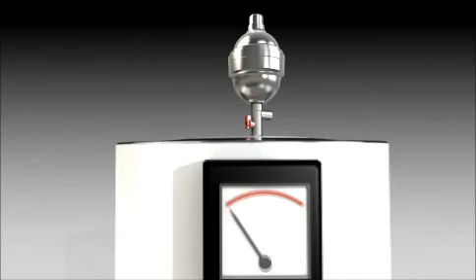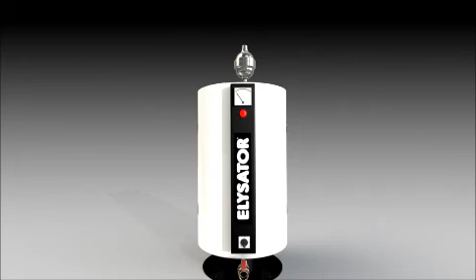What is an Elysator? The Elysator is a single tank that is fitted to the circulation or feed water system on heating and cooling systems where protection against corrosion and scale is required. The unit includes a pure magnesium anode, a cyclone filter and a galvanometer.

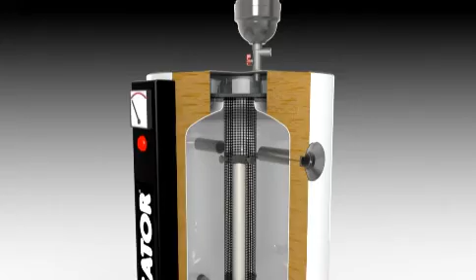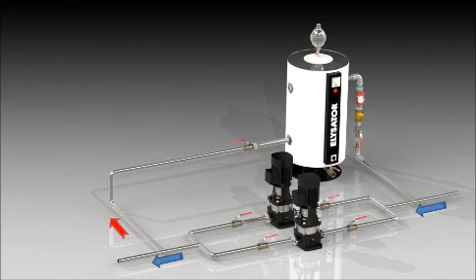The function of the Elysator is based on the anodic, cathodic principle, that is the allowance of a less noble metal, magnesium, to be sacrificed, corroded, instead of the system itself. During the corrosion process of the anodes, oxygen is consumed, creating H2O and magnesium hydroxide, therefore providing clean alkaline water that prevents corrosion and scale in the system.

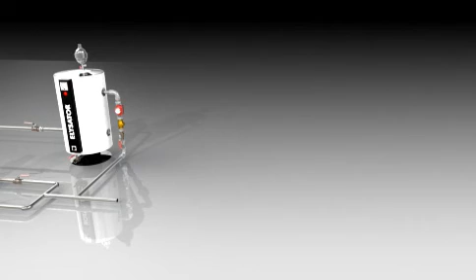Installation of Elysator. The Elysator should be installed in a bypass, so that a small volume of the total water volume will flow through. The Elysator does not have any electrical connection and does not use electricity. For some installations, like boilers, a small circulating pump is necessary.

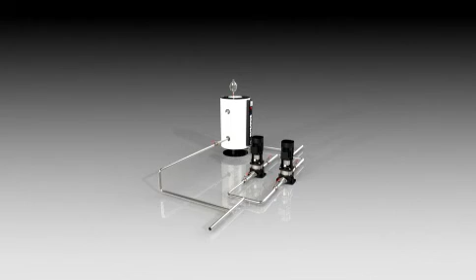The Elysator should be installed as close to the pump as possible, and at or below the lowest point in the system. The reason for this is that you want to collect as many particles as possible and to remove them from the system by the daily or weekly 10 to 30 second draining of the tank. Draining is to be done with full flow through the tank.

Always check that there is enough free height above the tank to pull the anodes for cleaning, types 15 to 260, and easy access to the drain valve. Elysator corrosion protection.

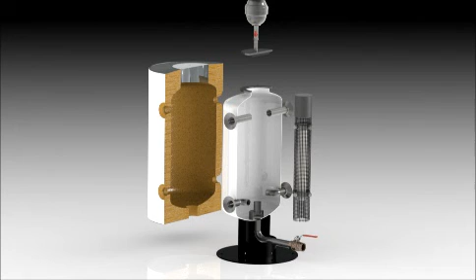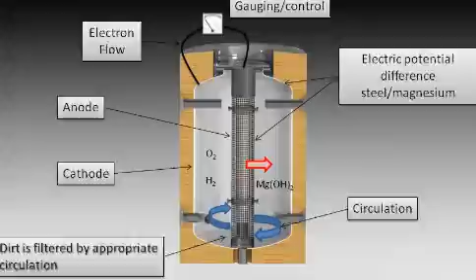Elysator is a circulation tank fitted with completely pure magnesium anodes. It is fitted into the water flow of the heating system by means of a bypass. Through a cathodic, anodic reaction with a sacrificial metal, magnesium, oxygen which is dissolved in the water is decreased to a safe level. Through this procedure magnesium hydroxide is formed, which leads to the pH value of the water increasing to an optimum level.

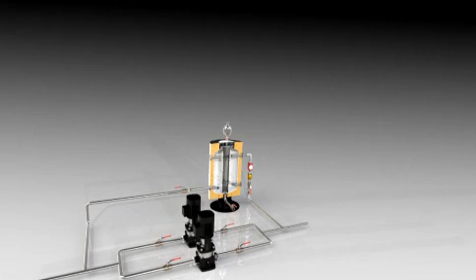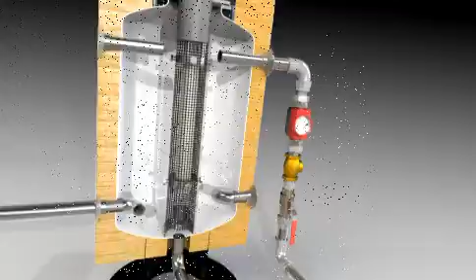Dependent on the system's water composition, the electrical conductivity then drops because the hardness of the water partially disappears. Therefore alkaline water with little salt content and with minimal oxygen concentration is produced. In systems where the water is changed by this procedure, no corrosion damage will occur.

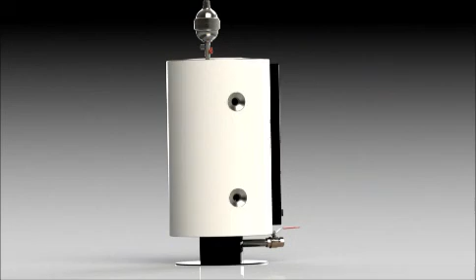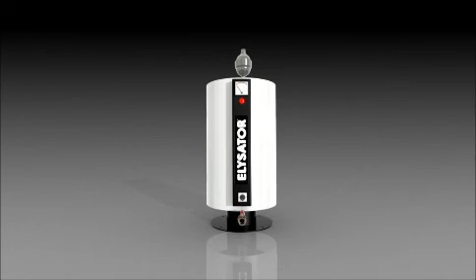By means of a built-in cyclone filter, the Elysator traps the remains of any corrosion which is still in the volume flow. This sludge can then be removed in the cleaning phase until the water is completely clear. Before Elysator is installed in old, heavily polluted systems which have been treated with chemicals, the systems should be thoroughly flushed, for example with Sanol H15.

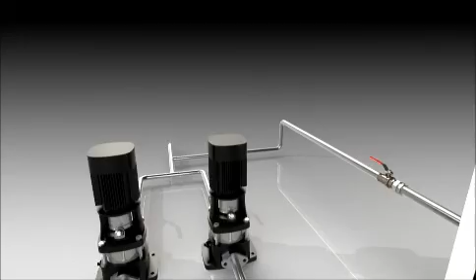Subsequent maintenance is limited to cleaning the anodes as required and changing anodes every 3 to 5 years. Elysator is a market-leading product for corrosion protection and has been used in heating and cooling systems for more than 30 years with excellent results. The Elysator is recommended for the protection of new systems and for cleaning of existing systems. Good water treatment, a clean system, will give 2 to 7% energy reduction.

The product philosophy behind the Elysator is protection from corrosion as simply and reliably as possible. The simplicity and effectiveness of our products means that we constantly have to meet the challenge of being better and more reliable than our imitators. This is a challenge that we have always successfully met and are eager to accept.